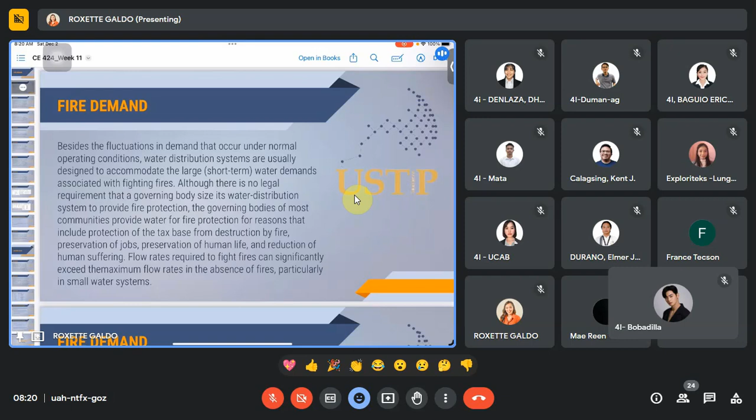In fact, for communities with populations less than 50,000, the need for fire protection is typically the determining factor in sizing water mains, storage facilities, and pumping facilities. In contrast to urban water systems, many rural water systems are designed to serve only domestic needs, and fire flow requirements are not considered in the design of these systems.

Numerous methods have been proposed for estimating fire flows, the most popular of which was proposed by the Insurance Services Office.

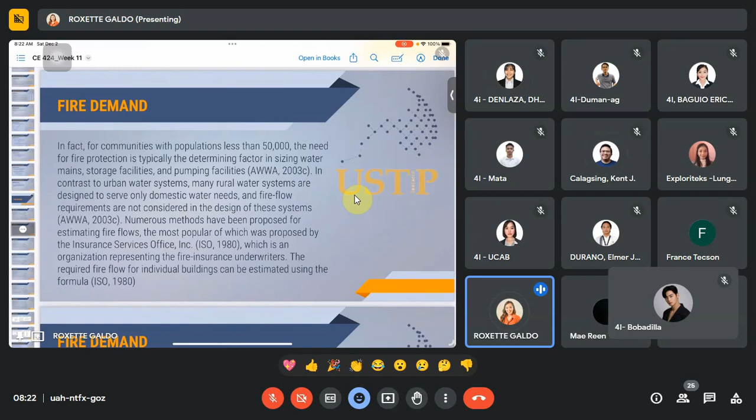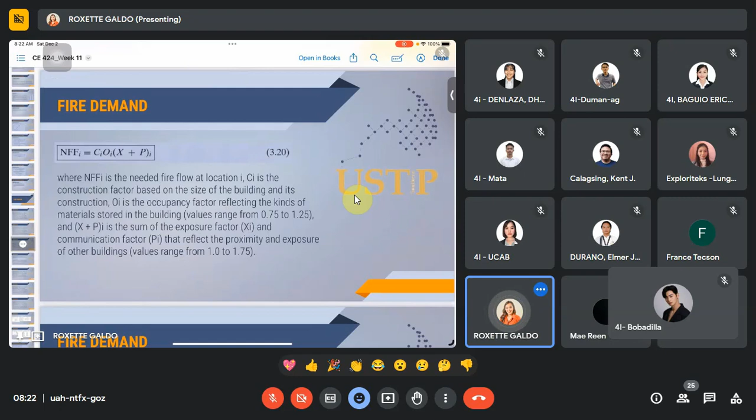The required fire flow for individual buildings can be estimated using this formula. We have capital NFF with subscript I, the needed fire flow at location I. NFF is the required fire flow. C here is the construction factor based on the size of the building and its construction — this will depend on the type of building and how large it is. O here is the occupancy factor, reflecting the kinds of materials stored in the building.

Usually, the value for the occupancy factor ranges from 0.75 to 1.25. X plus P is the sum of the exposure factor X and the communication factor P. These reflect the proximity and exposure of other buildings. Usually the value for this ranges from 1 to 1.75.

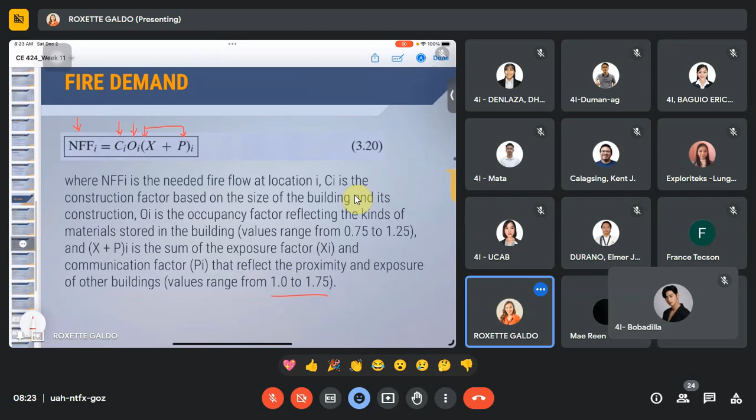This is typically equal to the area of the largest floor in the building plus 50% of the area of all other floors. So that is A — the estimated floor area.

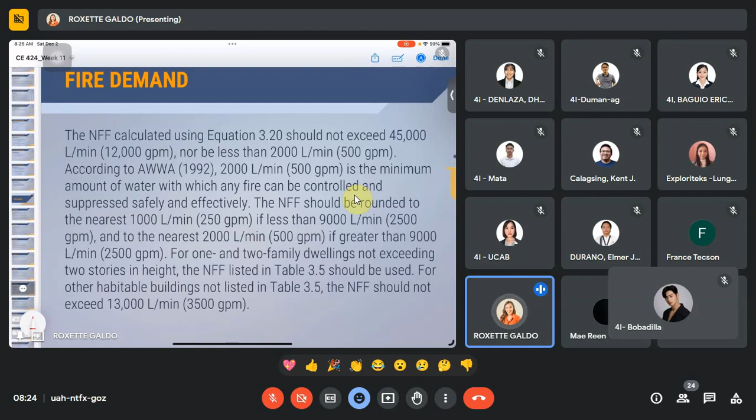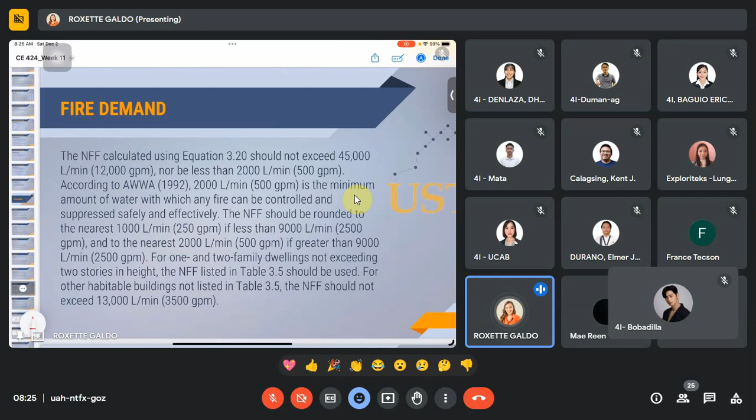The NFF calculated using the equation previously shown should not exceed 45,000 liters per minute, nor shall it be less than 2,000 liters per minute, according to AWWA 1992 — though that's a US standard, while we have the Fire Code of the Philippines, which is different. 2,000 liters per minute is the minimum amount of water with which any fire can be controlled and suppressed safely and effectively — so 2,000 liters per minute is the minimum fire flow.

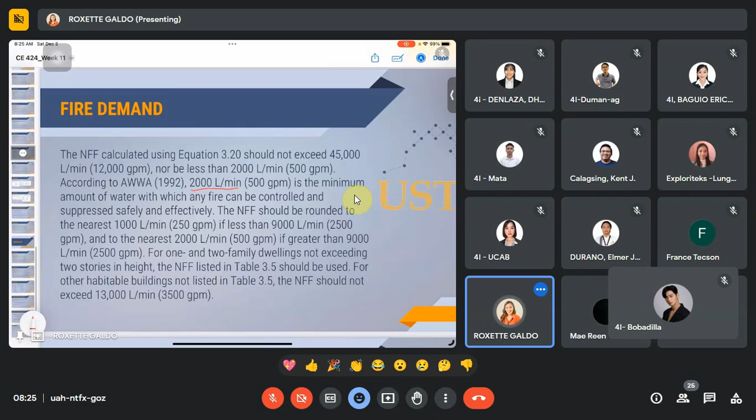Usually, the local water utility will have a policy on the upper limit of fire protection it will provide to individual buildings. Those wanting higher fire flows need to either provide their own system or reduce fire flow requirements by installing sprinkler systems, firewalls, or fire retardant materials.

Estimates of the needed fire flow calculated using that equation are used to determine the fire flow requirements of the water supply system, where the needed fire flow is calculated at several representative locations in the service area, and it is assumed that only one building is on fire at any time. The design duration of the fire should follow the guidelines stipulated in Table 3.6.

Okay, we will discuss this one by one. Okay, let us just finish this. Okay.

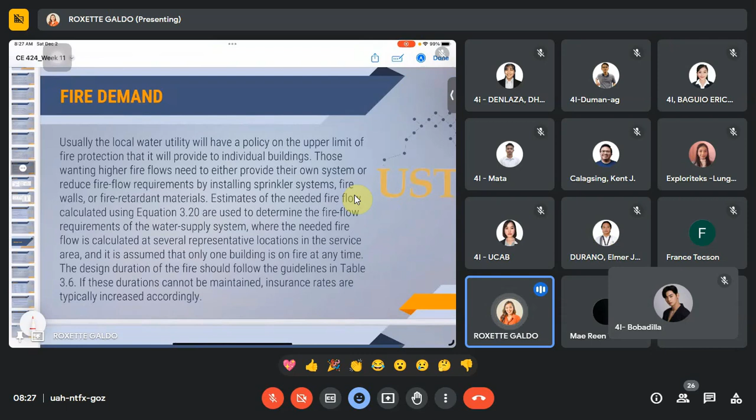So if these durations cannot be maintained, insurance rates are typically increased accordingly. So we have here table 3.3, if I may zoom in a little bit.

Okay, so according to our 1992 reference, we have classes of construction. This refers to what kind of material you use. This refers to what type of materials you use for your buildings. For class of construction, type 1.

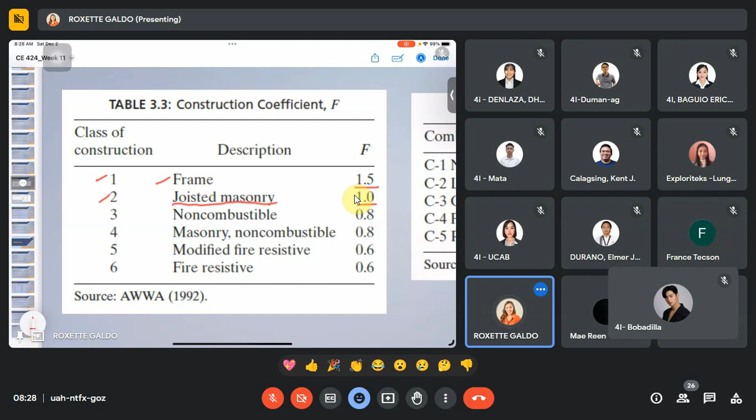If it is frame only, the value for your F is going to be 1.5. Class of construction 2, which is joisted masonry, the value of your F is going to be equal to 1. So where is this used?

Table 3.4, the occupancy factor. This one.

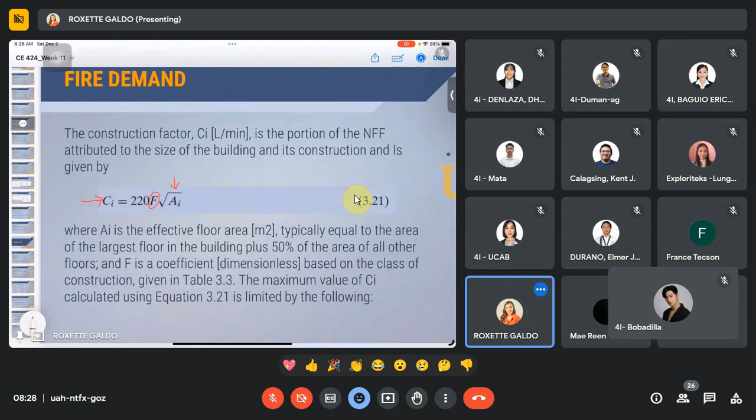By the way, that F from earlier, this is actually the CI here. I know, yeah, no, the CI is here. Yeah, okay, the CI uses the F. So that was from earlier. And then for your OI or your coefficient O, you can easily get it from table 3.

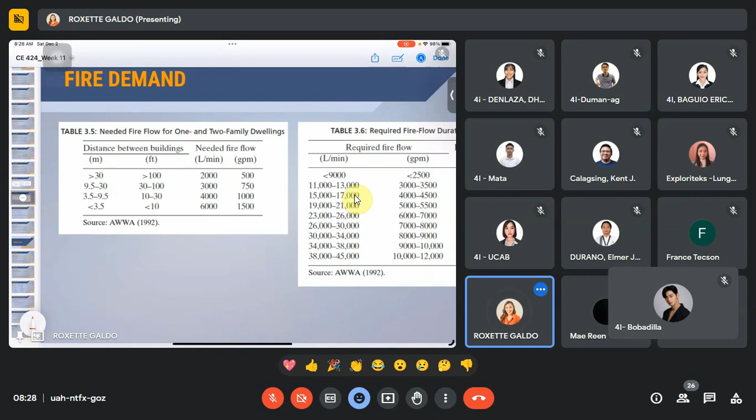Table 3.4. Okay. Depending on what it is, if it is a steel or concrete product storage, if it is an apartment, church, or office, or if it's a department store or supermarket, if it's an auditorium or warehouse, paint shops, or upholstering shops, it will have its own value for O respectively.

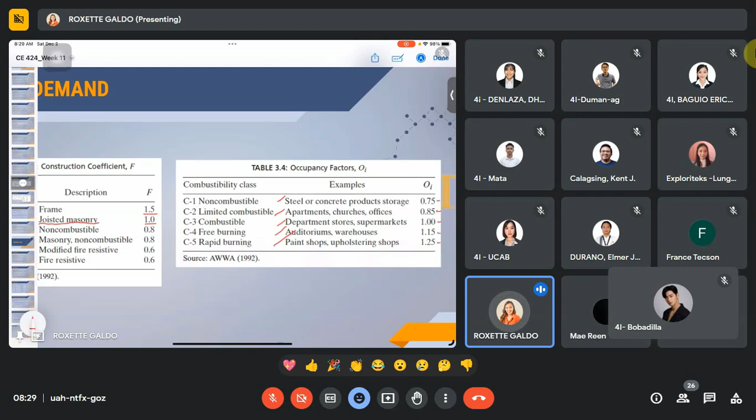So you don't need to solve for the values of these factors. You just have to identify them according to the materials you use for your building, which you use for your F to compute your CI, and the occupancy factor, meaning what the purpose of that building is.

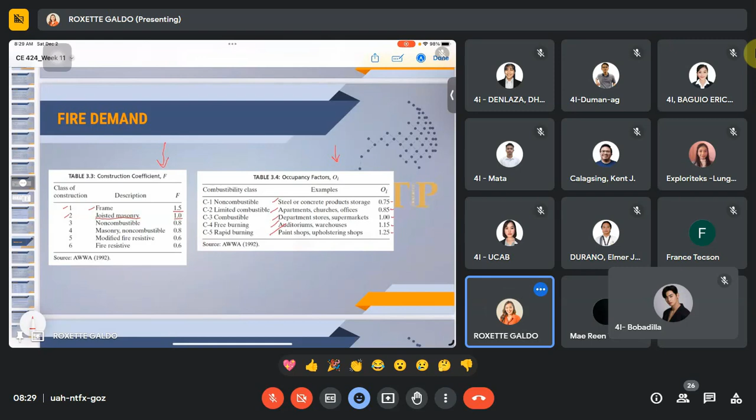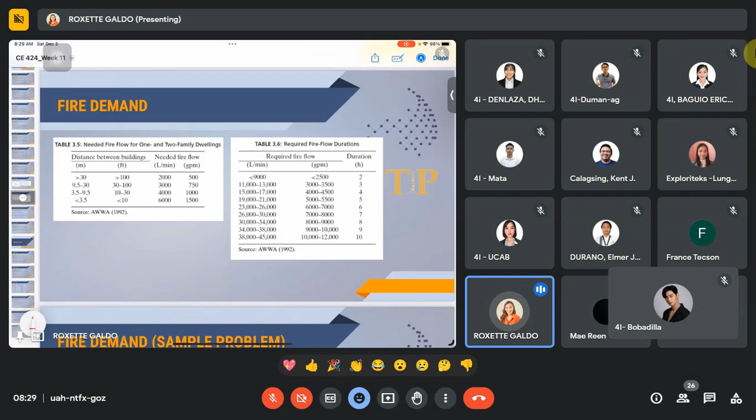Now, table 3.5, this refers to how far your building is from your neighboring buildings. This is a minimum, so basically, if your distance between buildings is greater than 30 meters, then the needed fire flow is at least

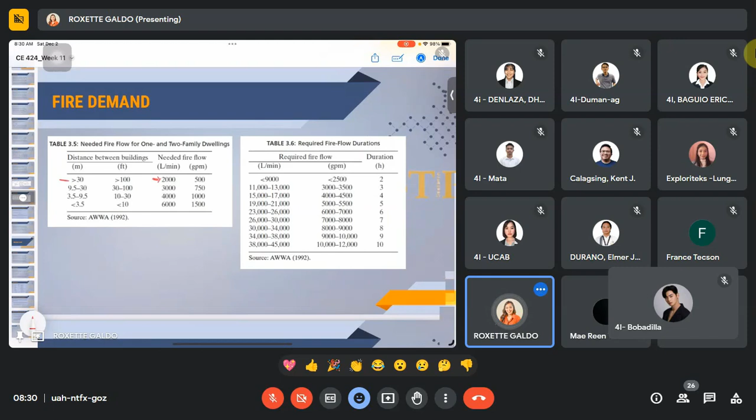2,000 liters per minute. Okay, so as you can notice, 9.5 to 30, 3.5 to 9.5, and then less than 3.5. So as you can notice, the smaller the distance to your neighboring building, the bigger your needed fire flow, or your NFF.

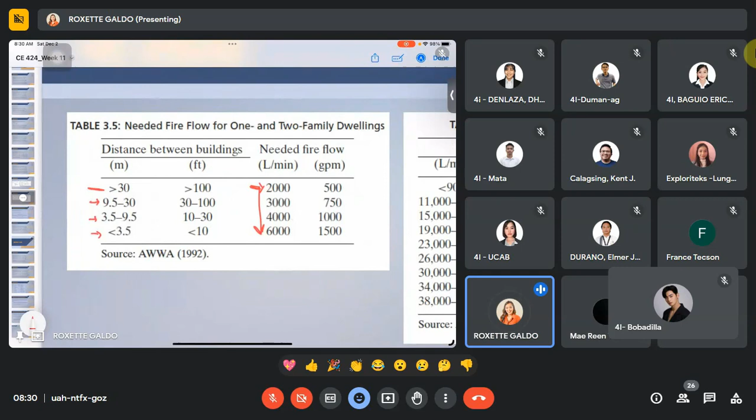Okay, so now table 3.6, this refers to the duration of the fire. So approximately, as the duration of the fire gets longer, from 2, 3, 4, 5, 6 hours to 10 hours, the required fire flow also gets bigger.

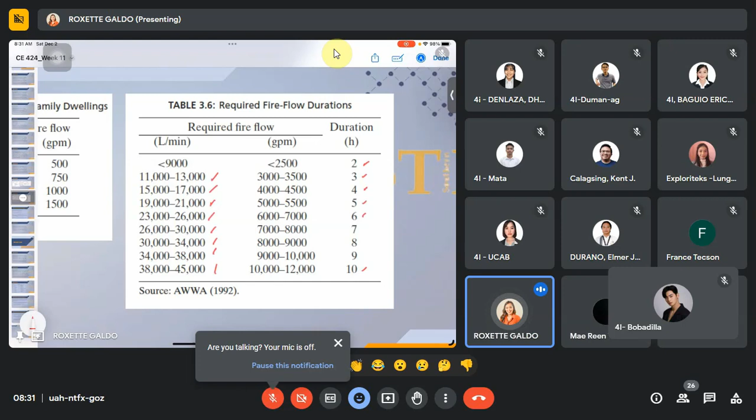Okay, so we have here a sample problem. We are to estimate the flow rate and the volume of water required to provide adequate protection to a 10-story non-combustible building with an effective floor area of 8,000 square meters.

So the equation for the needed fire flow, or the NFF, is this. NFF is equal to C sub I, O sub I, times X plus P sub I. Okay, so let us solve for the CI first. CI is equal to this one.

Okay, so for CI, we have two factors that we need the value for: the F and the A. The area is already given, which is equivalent to 8,000 square meters. Now we need to identify the value of F.

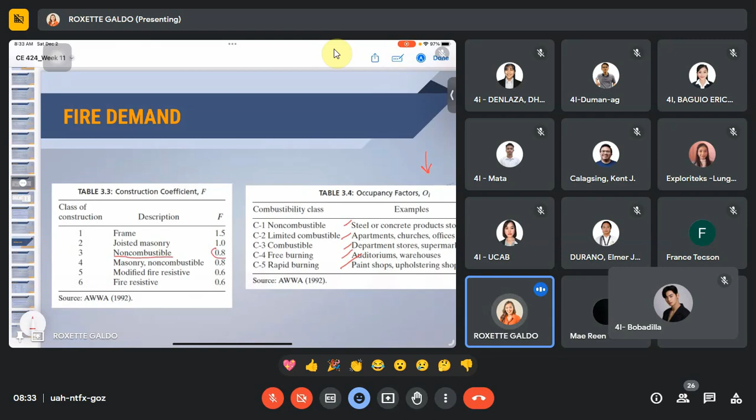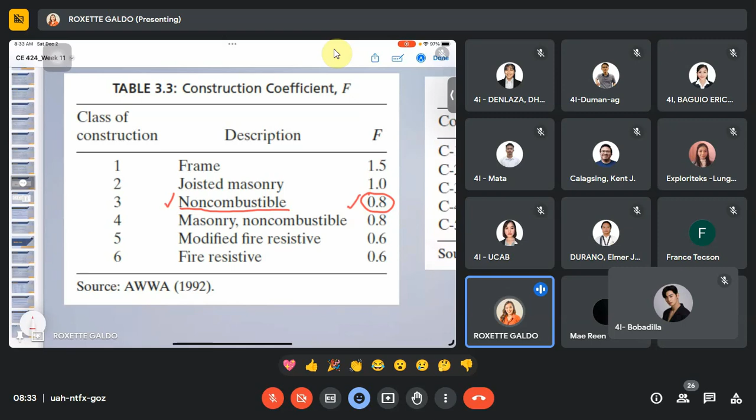But the problem has given us that it is a non-combustible building. So let us go to table 3.3 for a non-combustible building. That means, since it is non-combustible, its value for F is 0.8. According to table 3.3, the value for F is equal to 0.8. So that is what we are going to use here.

Okay, therefore CI is equal to 220, according to the equation, times the F, which is equal to 0.8, times the square root of the effective floor area, which is equivalent to 8,000 square meters. The value for the CI is 16,000 liters per minute.

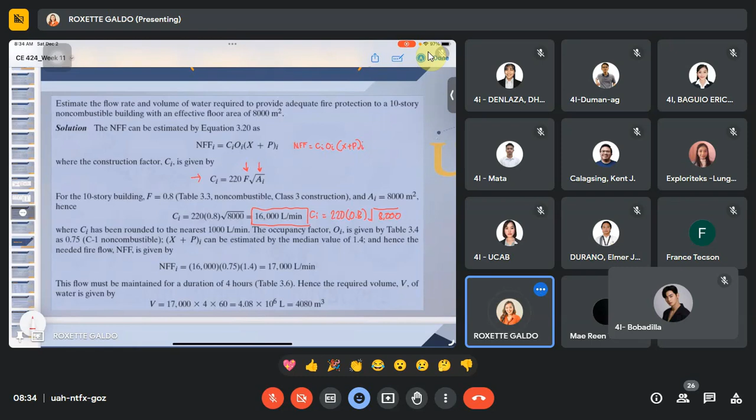Okay, so if you calculate this as 220 times 0.8 times the square root of 8,000, you will get a number with decimal places. But the rule for the CI is that it has to be rounded to the nearest 1,000. So if the value you get is 15,742, you are going to round this off to 16,000. Okay, so there is a rule.

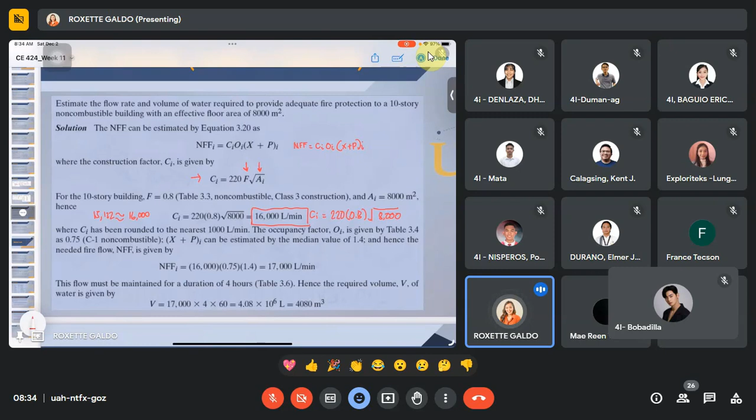Now the occupancy factor will be given by table 3.4. So in our NFF equation, we already know the value of the CI, which is 16,000. We still need to get the value for the OI, or the occupancy factor, and we can get it from table 3.4.

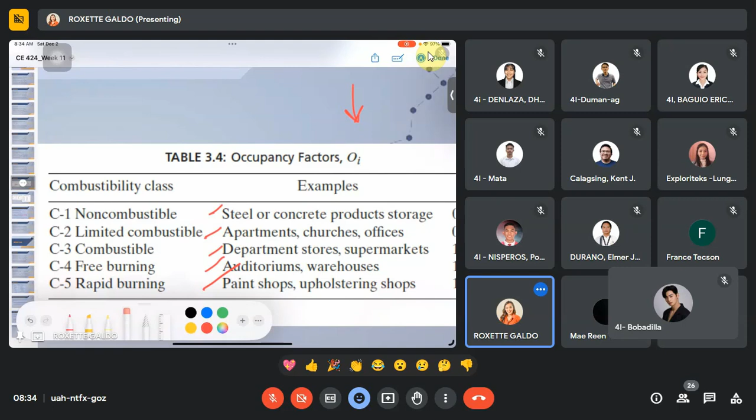Okay, so according to table 3.4, for a non-combustible building, the value for O is 0.75. Okay, I will just transfer this once again.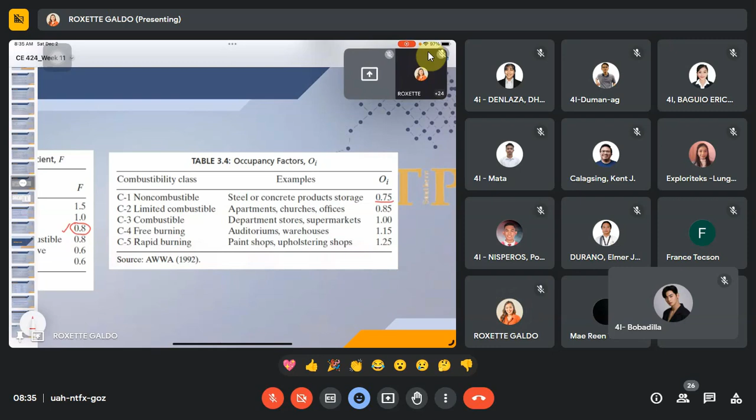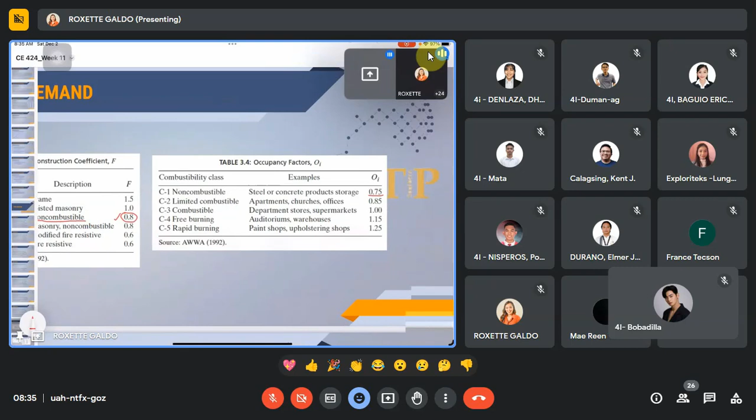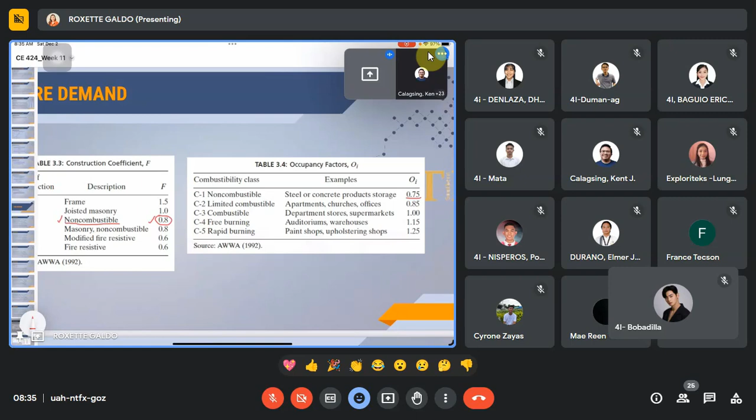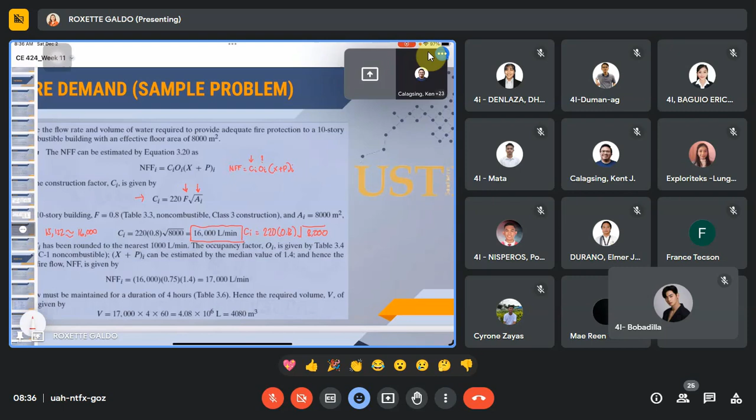Okay, so according to table 3.4, the value for the O is 0.75. Let us go back here. So the O here is 0.75, and the 16 here is the CI, where we were able to identify the value using this equation.

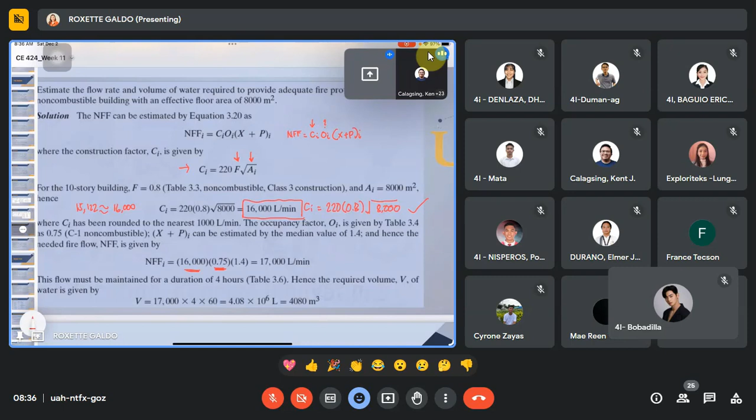So the X plus P can be estimated by the median value of 1.4. Hence, the needed fire flow will be 16,000, which is the CI, times the OI, 0.75, and the median value for X plus P is 1.4. This is also given, the X plus P.

It is estimated based on the, what you call this one, fire demand forecast. So the NFF, needed fire flow, will be equivalent to 17,000 liters per minute.

This flow must be maintained for a duration of 4 hours. So hence, the required volume of water shall be the required fire flow in liters per minute times 4 hours, times the conversion factor, for minutes to hours, which is 60. Therefore, the needed fire flow or anticipated volume of water to be spent for the fire demand will be 4,080 cubic meters.

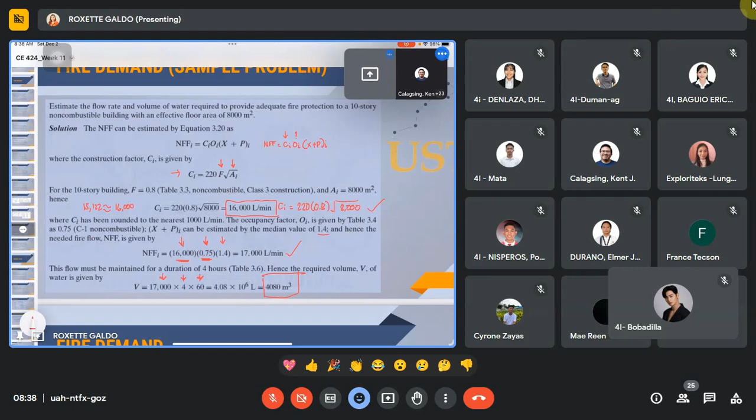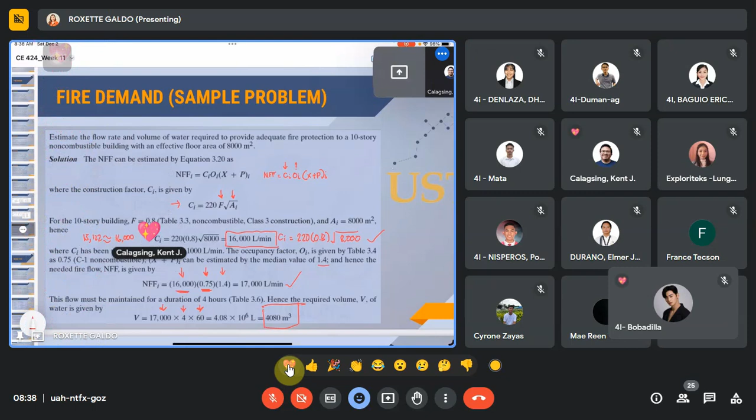Okay, so any questions regarding this? By the way, this is already available in the Google Drive folder that I have given you. You may review this already. Do you have any questions, or can you give me a heart react if you were able to understand the topic on fire demand? Okay, so that was all for fire demand.

Moreover, fire hydrants are placed throughout the service area to provide either direct hose connections for firefighting or connections to pumper trucks, also known as fire engines. A single hose stream is generally taken as 1,000 liters per minute, called the standard fire stream, and hydrants are typically located at street intersections or spaced at 60 to 150 meters.

But fire hydrants, we rarely see this one in the Philippines, right? So fire hydrants are commonly seen in countries like the United States.

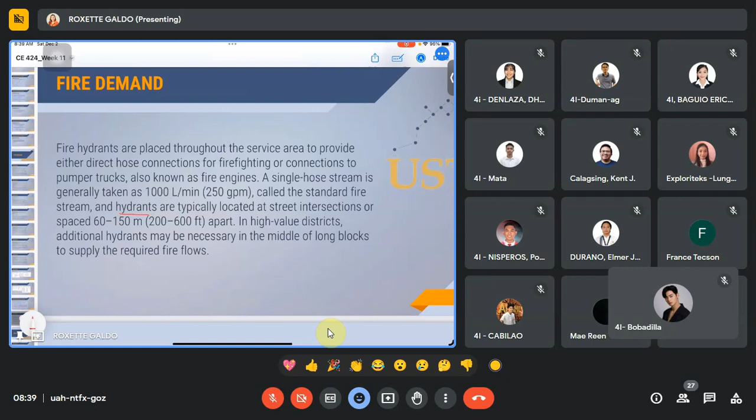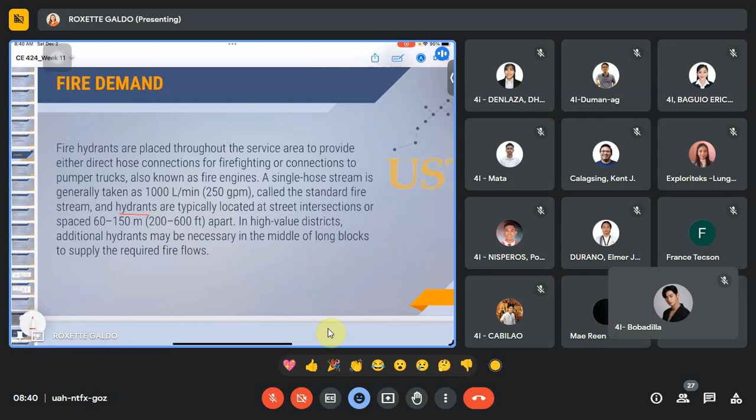In high value districts, additional hydrants may be necessary in the middle of long blocks to supply the required fire flows. So depending on the volume of water or the strength of the flow rate needed, it may not be possible to connect the hose to our CR sink at home. That's why fire hydrants are needed and installed.

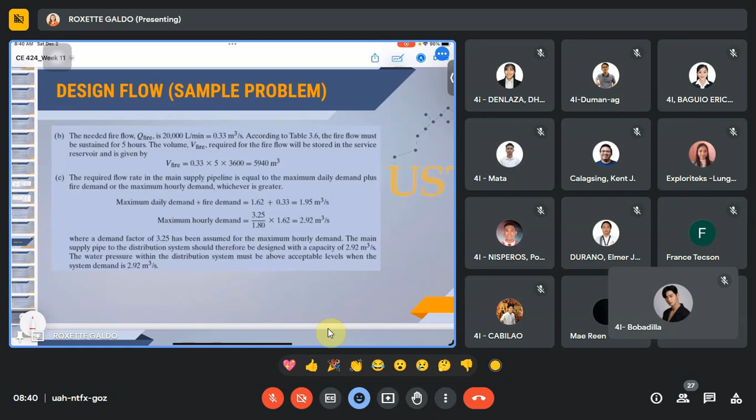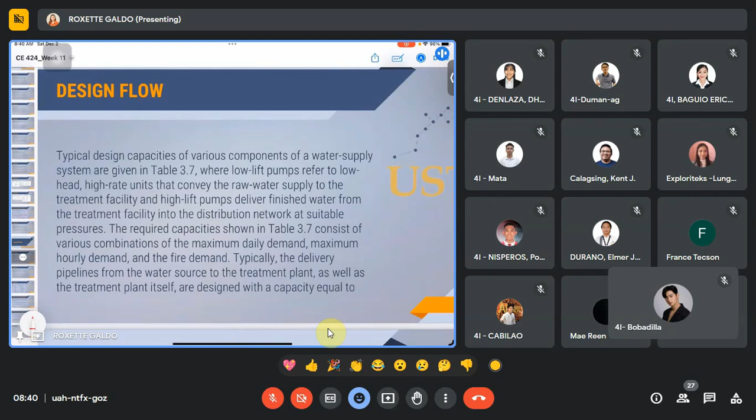So let us have the design flow. For the design flow, the typical design capacities for various components of water supply systems are given here at table 3.7. Typical design period, that means to say, how many years? 10, 25, 25 to 50, and so on.

Low lift pumps refer to low head and high rate units that convey the raw water supply to the treatment facility, and high lift pumps deliver finished water from the treatment facility into the distribution network at suitable pressures. The required capacities shown in table 3.7 consist of various combinations of the maximum daily demand, maximum hourly demand, and the fire demand.

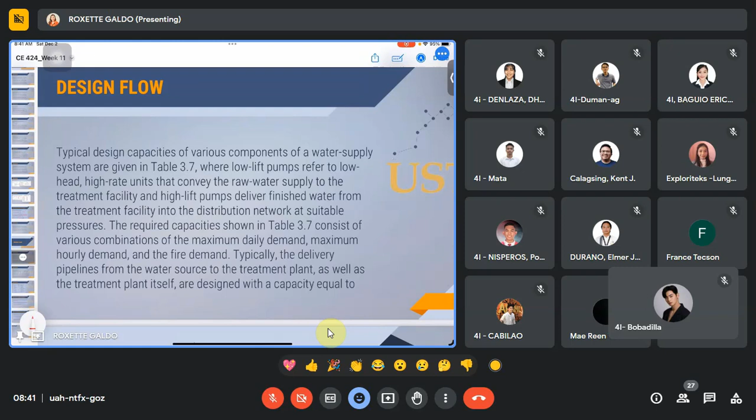Typically, the delivery pipelines from the water source to the treatment plant, as well as the treatment plant itself, are designed with a capacity equal to the maximum daily demand. However, because of the high cost of providing treatment, some utilities have trended toward using peak flows averaged over a longer period than 1 day to design water treatment plants, relying on system storage to meet peak demands above treatment capacity. This approach has serious water quality implications and should be avoided if possible.

The flow rates and pressures in the distribution system are analyzed under both the maximum daily plus fire demand, and the maximum hourly demand, and the larger flow rate governs the design.

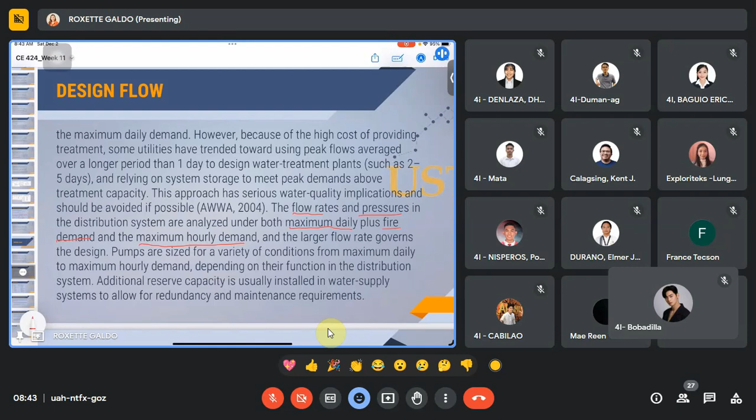Whichever gives the largest value shall govern the design. Pumps are based on a variety of conditions from maximum daily to maximum hourly demand, depending on their function in the distribution system. Additional reserve capacity is usually installed in water supply systems to allow for redundancy and maintenance requirements. So this is table 3.7.

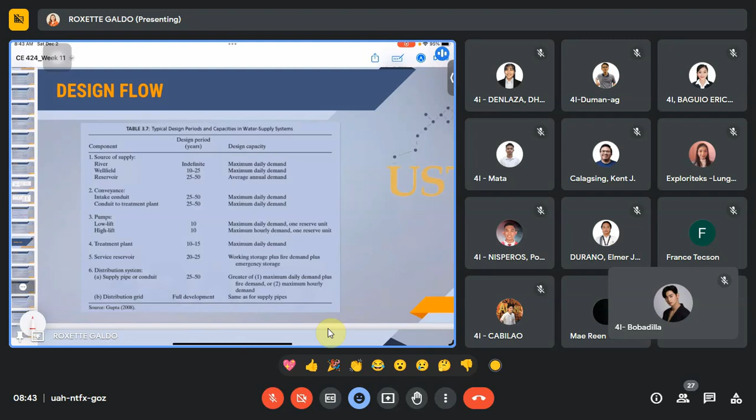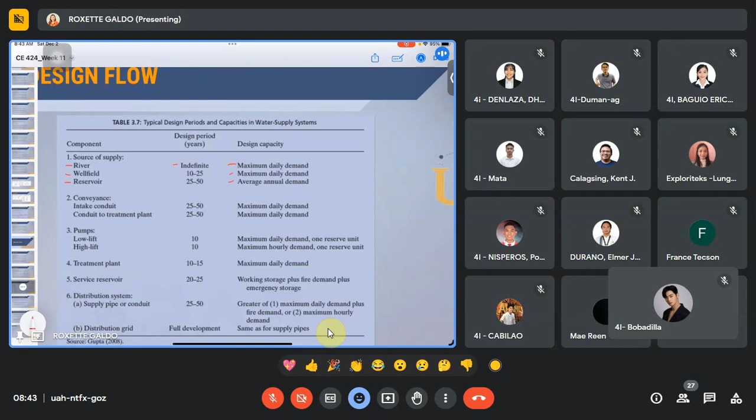So if you are going to design a water system wherein the water used will come from a river, the design period for that is indefinite, and the design capacity you are going to adapt is the maximum daily demand. If it is coming from a well field, you should use the maximum daily demand. If it is coming from a reservoir, you are going to design for the average annual demand. So it goes like that, and so on and so forth.

Okay, so let us have the sample problem.

So a metropolitan area has a population of 130,000, with an average daily demand of 600 liters per day per person. If the needed fire flow is 20,000 liters per minute, we should estimate the design capacity for the well field and the water treatment plant, the duration that the fire flow must be sustained, the volume of water that must be kept in the service reservoir in case of fire, and the design capacity of the distribution system.

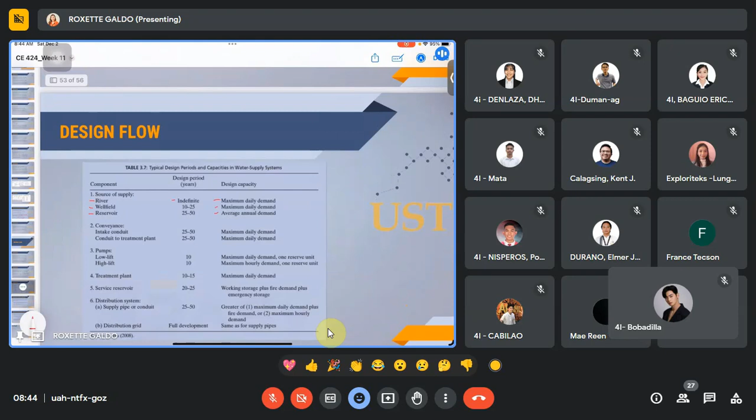So first, we should identify the design capacity for the well field. The design capacity of the well field should be equal to the maximum daily demand, according to table 3.7. So for the well field, the design should be based on the maximum daily demand.

With a demand factor of 1.8, coming from the water demand topic, the per capita demand on the maximum day is equal to 1.8 times 600, which equals 1,080 liters per day per person. Since the population served is 130,000, the design capacity of the well field is given by 1,080 liters per day per person times 130,000 persons, which equals 1.4 times 10 to the eighth liters per day, or 1.62 cubic meters per second.

So the design capacity of the water treatment plant is also equal to the maximum daily demand and therefore should be taken as 1.62 cubic meters per second, since it's based on the maximum daily demand according to table 3.7.

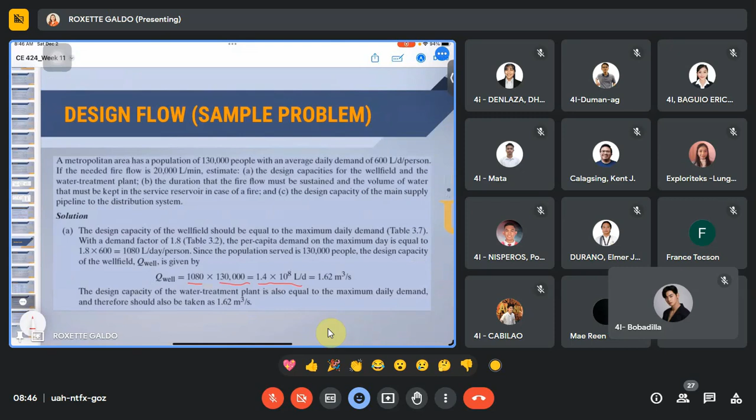Now the second thing being asked is the needed fire flow, the duration that the fire flow must be sustained, and the volume of water that must be kept. The needed fire flow is given in the problem, equivalent to 20,000 liters per minute, or 0.33 cubic meters per second. According to table 3.6, the fire flow must be sustained for 5 hours.

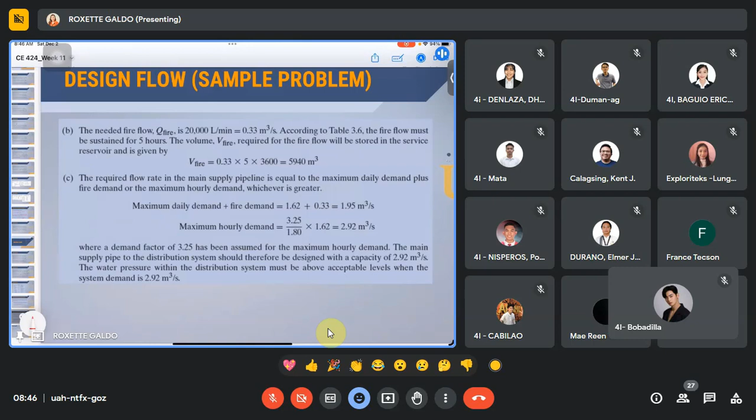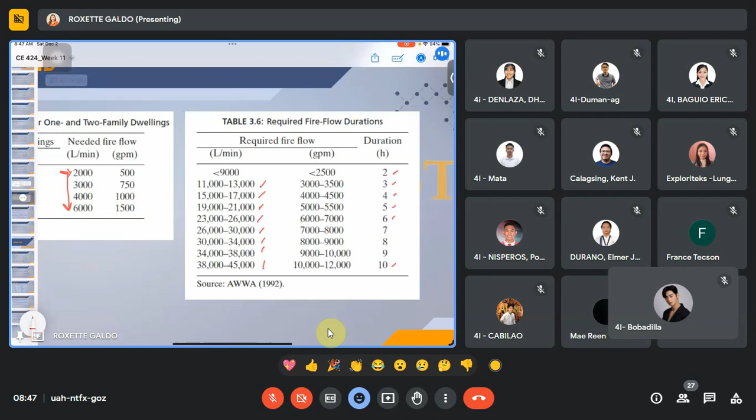So that's from table 3.6. Remember this one: 20,000 liters per minute. Let's go to table 3.6. Based here, how much was it, 20? So it falls here, yes. So it should be maintained for 5 hours.

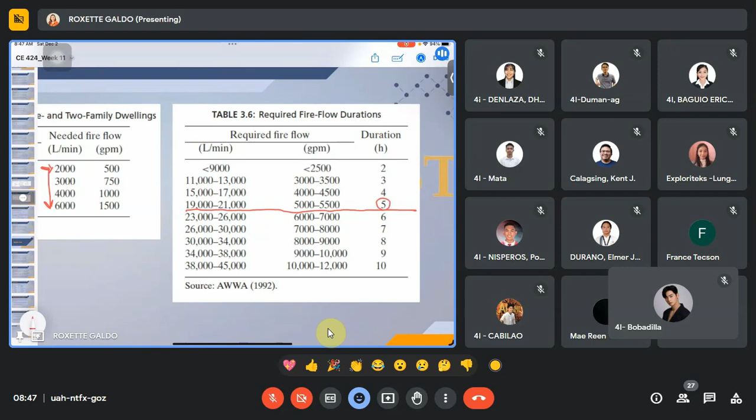Now the flow rate is 20,000 liters per minute. Going back here, 0.33 cubic meter per second - this is just a conversion of the 20,000 liters. Times 5 hours, times the conversion factor of 3600, which converts hours to seconds. So this is 0.33 cubic meter per second times 5 hours. For us to cancel out the hours, we convert into seconds, then we're left with cubic meters, which is equivalent to 5,940.

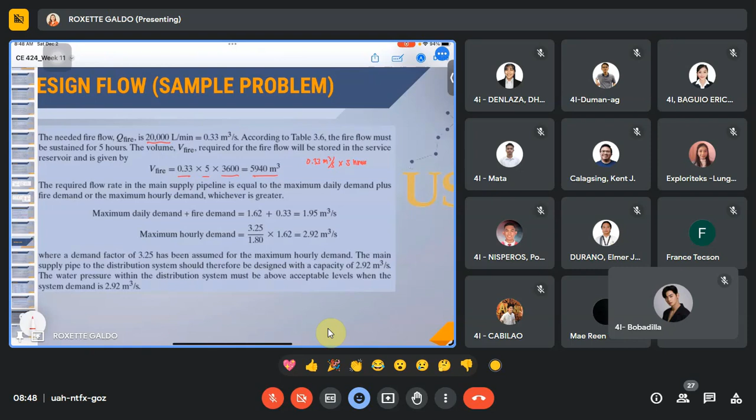So the answer to how long the fire flow shall be maintained is equivalent to 5 hours, and the volume required to be stored in the service reservoir in case of fire is 5,940 cubic meters. So that answers the second question asked.

The last thing we should identify is the design capacity of the main supply pipeline to the distribution system. The required flow rate in the main supply pipeline is equal to the maximum daily demand plus the fire demand, or the maximum hourly demand, whichever is greater. So the first option is to check maximum daily demand plus fire demand. Second would be the maximum hourly demand.

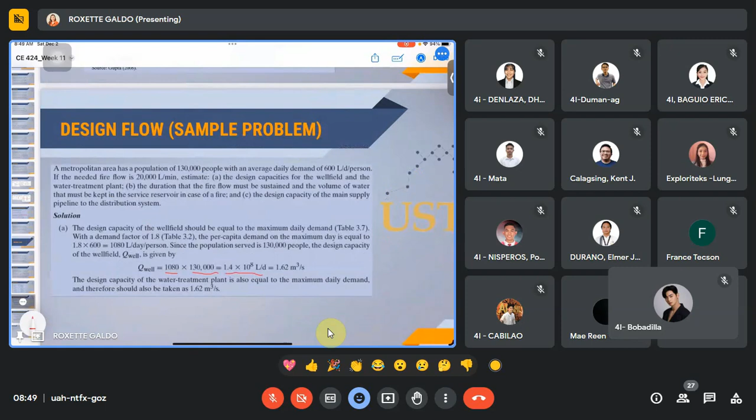So the maximum daily demand is 1.62, based on our answer in part A, plus the fire demand which is given to be 0.33. So 1.62, the maximum daily demand which we computed based on per capita consumption, plus 0.33 which was already given, equals 1.95 cubic meters per second.

So the maximum hourly demand is equal to 3.25 over 1.8 times 1.62. This 3.25 has been assumed for the maximum hourly demand. So the main supply pipe to distribute water should therefore be designed to a capacity of 2.92 cubic meters per second.

So the maximum hourly demand is 2.92, while the maximum daily demand plus the fire demand is only 1.95. According to our discussion, the one greater should govern. Therefore, 2.92 cubic meters per second shall be the system demand to be adapted in the water distribution system - that should be your design flow rate.